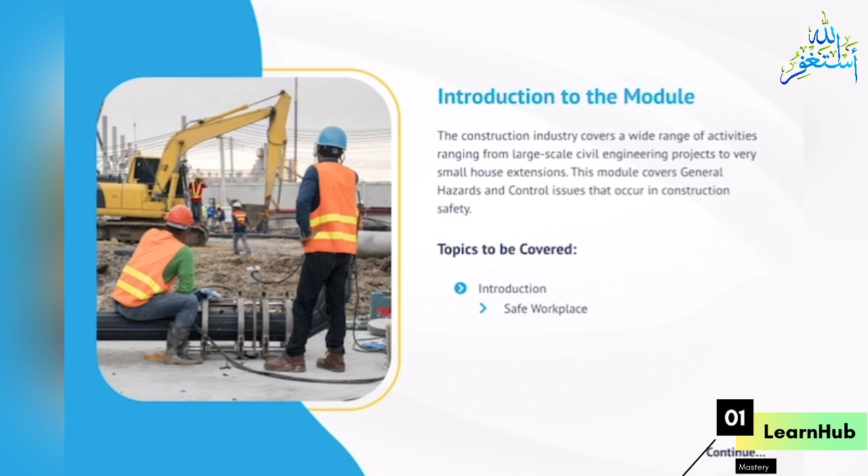Topics to be covered: Introduction, Safe workplace, General hazards and controls, Protection against falls, Protection against falling objects, Vehicles and traffic routes, Noise, Site controls, Site planning, Site security, and Provision of welfare facilities.

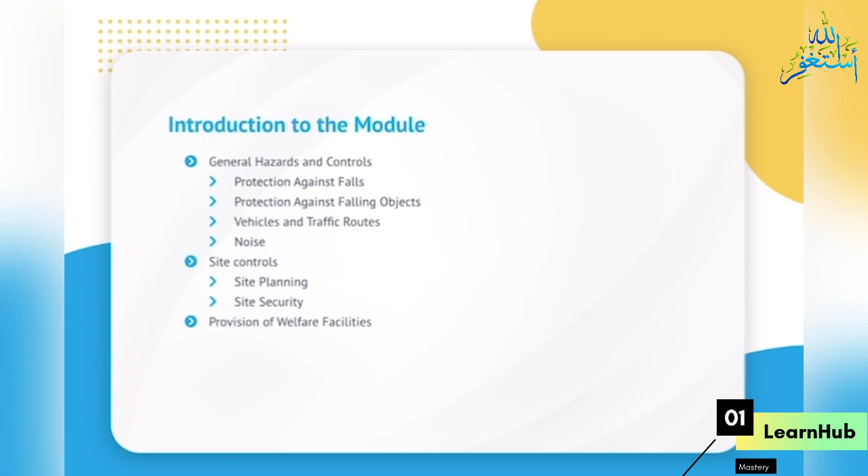Introduction. Over many years, the construction industry has had a poor health and safety record. In 1966, there were 292 fatalities in the industry, and by 1995 this figure had reduced to 62.

But by 2001 the figure had increased to 106. Over the last 25 years, 2,800 people have died on construction sites.

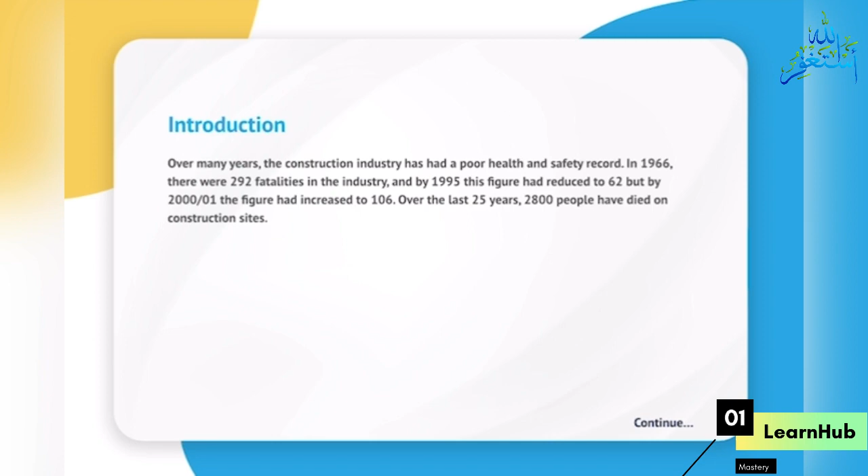These figures include deaths of members of the public, including children playing on construction sites. Although most of these fatalities, over 70%, were caused by falls from height, there are other significant causes.

The HSE has listed the main causes of fatalities as falling through fragile roofs and roof lights, falling from ladders, scaffolds and other workplaces, being struck by excavators, forklift trucks or dumper trucks, overturning vehicles, and being crushed by collapsing structures.

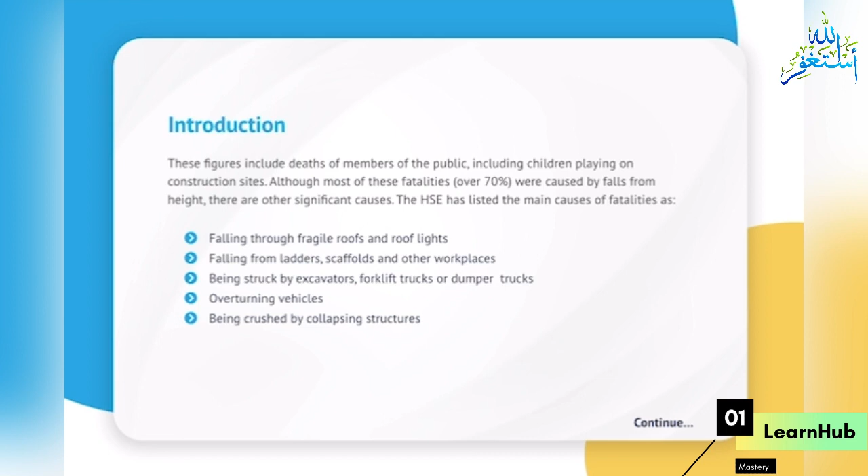Safe workplace. Safe entrance to and exit from the site, as well as specific work areas on the site, are essential to better health and a safe environment.

This clearly requires the safe use of ladders, scaffolds, gangways, stairways, and passenger hoists. It further requires that all excavations are fenced, the site is tidy, and proper arrangements are in place to store materials and dispose of waste.

When the site is not in use, it must be well lighted and protected against intruders, particularly minors.

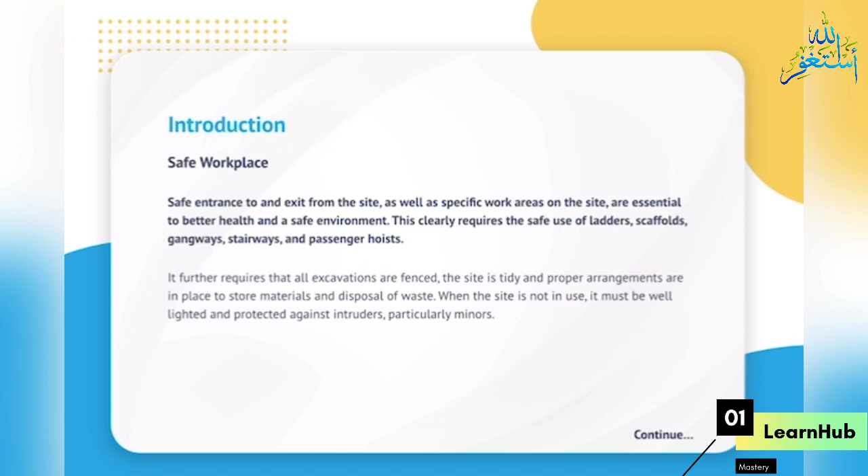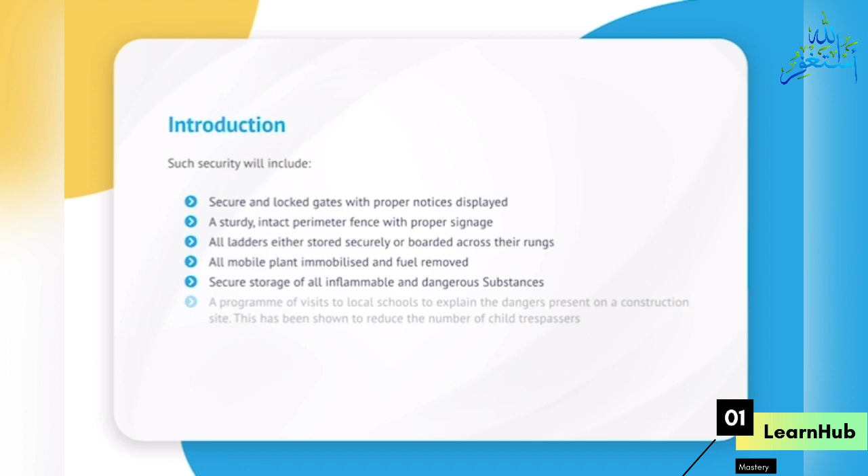Such security will include secure and locked gates with proper notices displayed, a sturdy, intact perimeter fence with proper signage, all ladders either stored securely or boarded across their rungs, all mobile plant immobilized and fuel removed, secure storage of all inflammable and dangerous substances, and a program of visits to local schools to explain the dangers present on a construction site.

This has been shown to reduce the number of child trespassers. Security patrols and closed-circuit television may need to be considered if unauthorized entry persists.

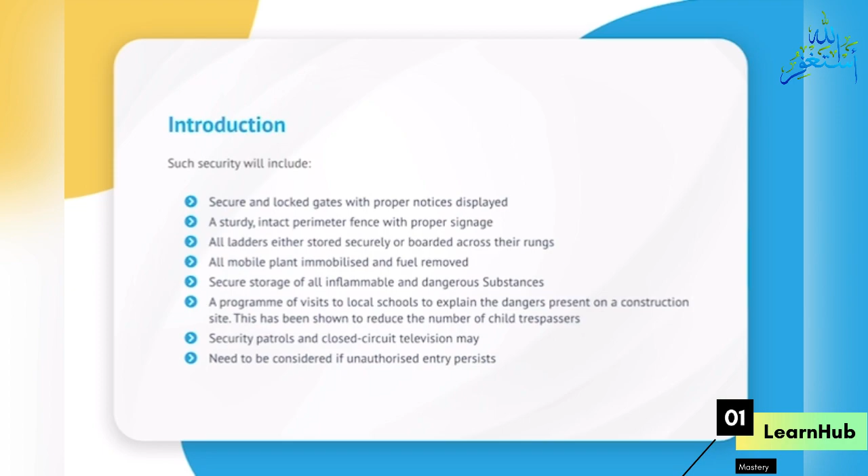General hazards and controls. The Construction, Health, Safety and Welfare Regulations 1996 deal with the main hazards likely to be found on a construction site. The hazards and controls identified in the construction regulations are as follows.

Protection against falls. Falls from height are the most common cause of serious injury or death in the construction industry. These falls are normally from a height but may also be on the same level.

It is important that trip hazards, such as building and waste materials, are not left on site walkways or roadways.

Protection against falling objects. Construction workers and members of the public need to be protected from the hazards associated with falling objects. Both groups should be protected by the use of covered walkways or suitable netting to catch falling debris.

Waste material should be brought to ground level by the use of chutes or hoists. Waste should not be thrown from scaffolding, and only minimal quantities of building materials should be stored on working platforms.

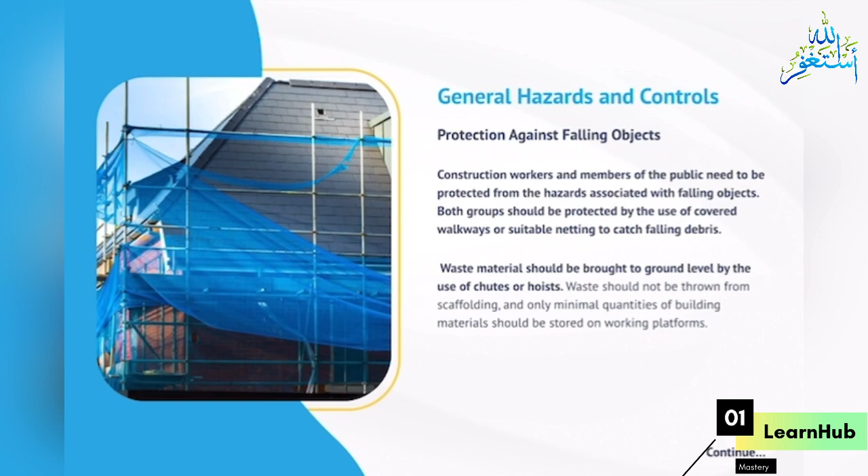The Construction Head Protection Regulations virtually mandate employers to supply head protection, hard hats, to employees whenever there is a risk of head injury from falling objects.

The employer is also responsible for ensuring that hard hats are properly maintained and replaced when they are damaged in any way. Self-employed workers must supply and maintain their own head protection.

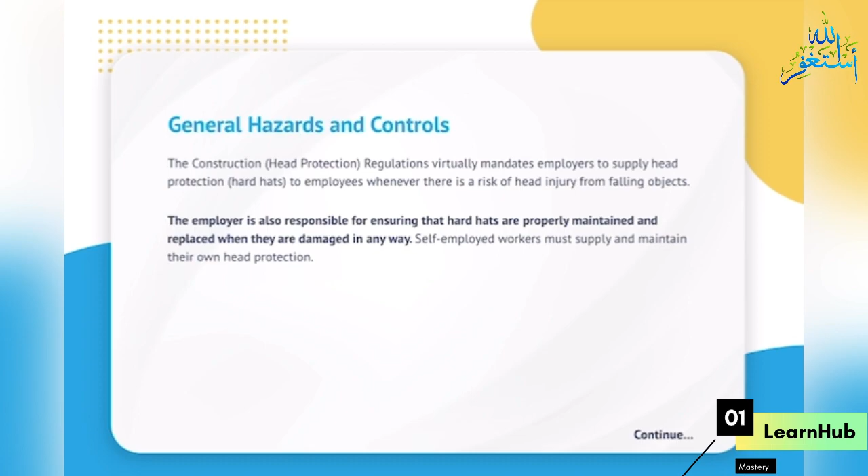Employees must wear head protection when so directed, take good care of it, and report any loss or defect. Visitors to construction sites should always be supplied with head protection, and mandatory head protection signs should be displayed around the site.

Injuries due to falling materials are not limited to materials falling from height. Many fatalities have been caused by the collapse of walls, particularly retaining walls, and by the collapse of excavations.

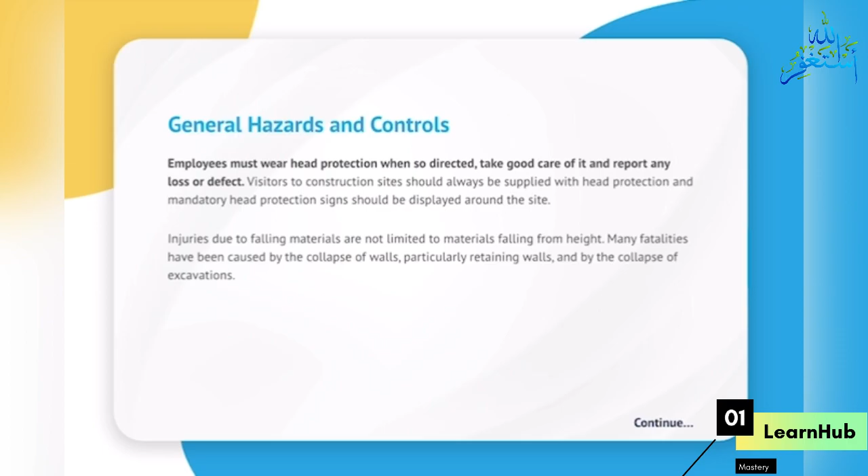Vehicles and traffic routes. All vehicles used on site should be maintained on a regular basis and records should be kept. Only trained drivers should be permitted to operate cars, and the training should be vehicle-specific. Vehicles should have reversing warning systems installed.

HSE investigations have shown that in over 30% of dumper truck accidents, the drivers had little experience and no training. Common forms of accident include driving into excavations, overturning whilst driving up steep inclines, and runaway vehicles left unattended with the engine running.

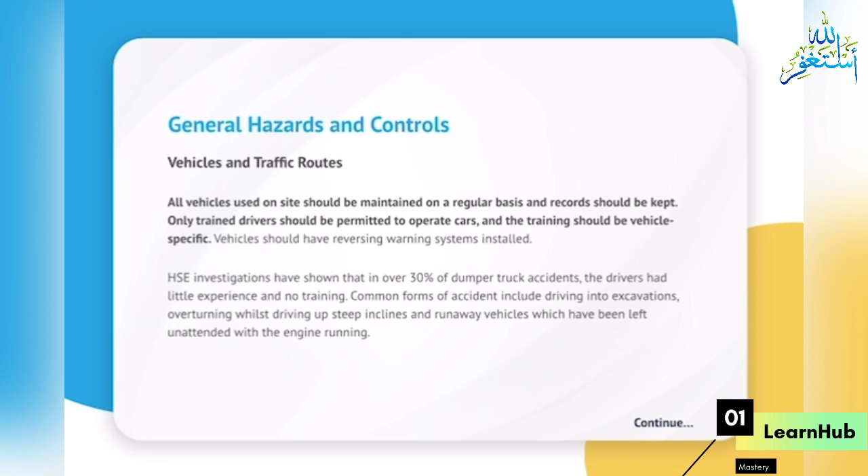Many vehicles, such as mobile cranes, should be inspected on a regular basis and have test certificates. Traffic routes and loading and storage spaces must be adequately constructed, with enforced speed limits, sufficient visibility, and vehicle and pedestrian separation in mind. The use of one-way systems and separate site access gates for vehicles and pedestrians may be required. Finally, the safety of members of the public must be considered, particularly where vehicles cross public footpaths.

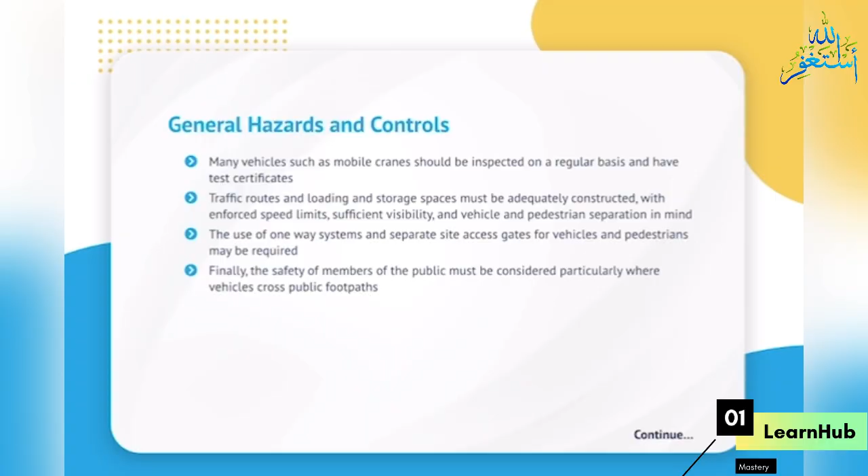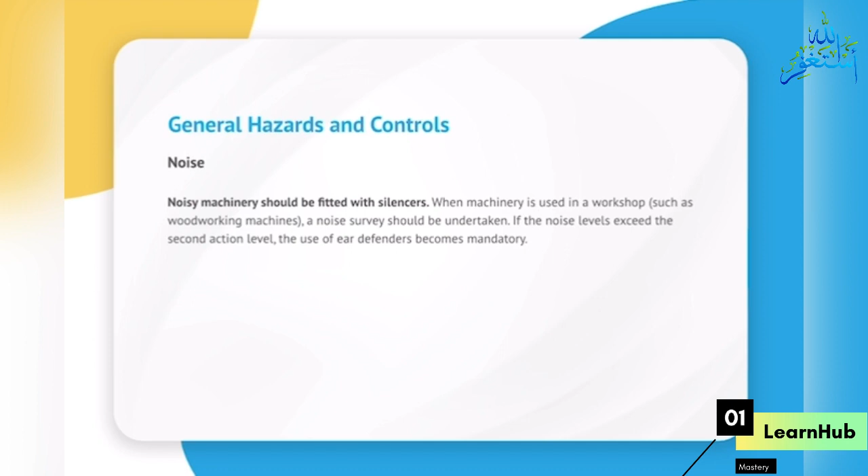Noise. Noisy machinery should be fitted with silencers. When machinery is used in a workshop, such as woodworking machines, a noise survey should be undertaken. If the noise levels exceed the second action level, the use of ear defenders becomes mandatory.

Site controls. Site planning. An essential element of site planning is the layout of the site. Due to a lack of forethought or planning, many sites rapidly degenerate into a muddled or confused state. This leads to a corresponding reduction in health and safety standards and an increase in accidents.

During the site planning stage, arrangements will be needed to ensure safe access to and around the site for pedestrians and vehicles. Care must be taken during the planning of traffic routes so that pedestrians and vehicles are kept apart as much as possible. It will also be necessary to provide suitable loading and unloading areas, which may need to be moved as the construction work progresses, and recognized parking areas.

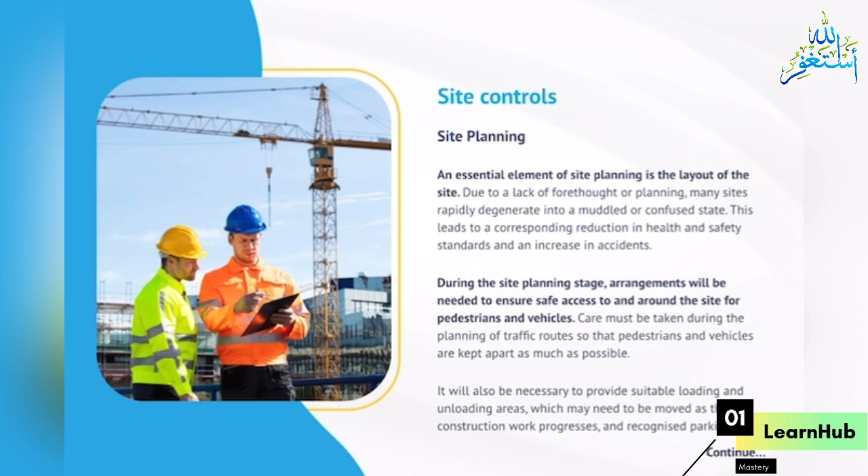Adequate lighting must be provided in all parts of the site, especially along vehicle routes, although natural light should be made available whenever possible. When lighting failure could lead to severe risks of accidents, such as working on a tower scaffold, secondary lighting should be provided, perhaps in the form of torches.

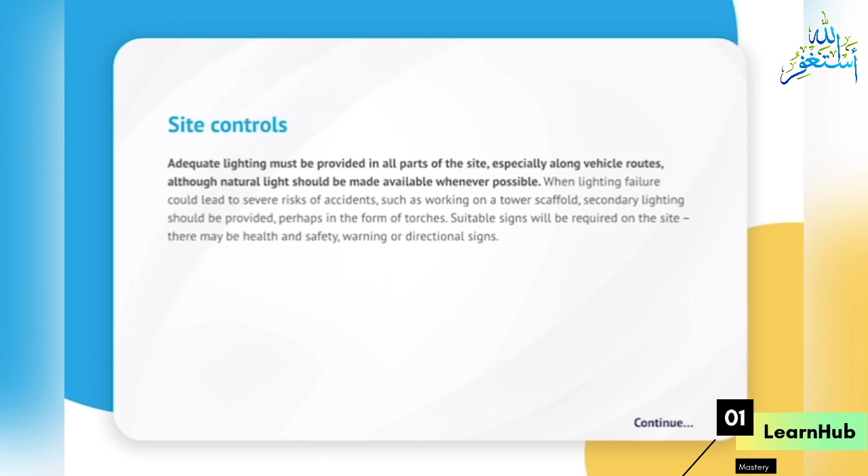Suitable signs will be required on the site. There may be health and safety, warning or directional signs.

Emergency arrangements need to be in place before work begins. These arrangements should deal with fire precautions, accident reporting and investigation, and the provision of an accident book together with RIDDOR reporting forms. Whatever the type of construction project, the disposal of any waste produced must be planned.

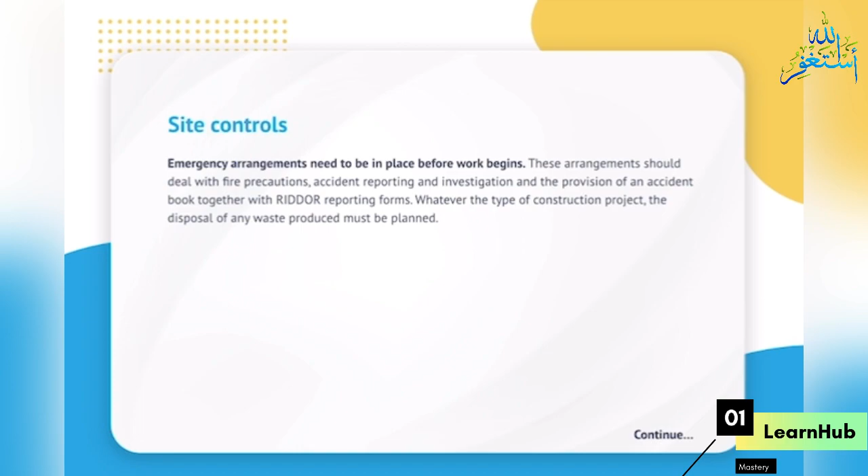There are four requirements for the transfer of waste from the site to final treatment or disposal. Firstly, the waste must be clearly identified. This will involve the determination of the chemical and physical properties of the material, the identification of any special problems associated with the waste, and that it is properly labeled with a written description.

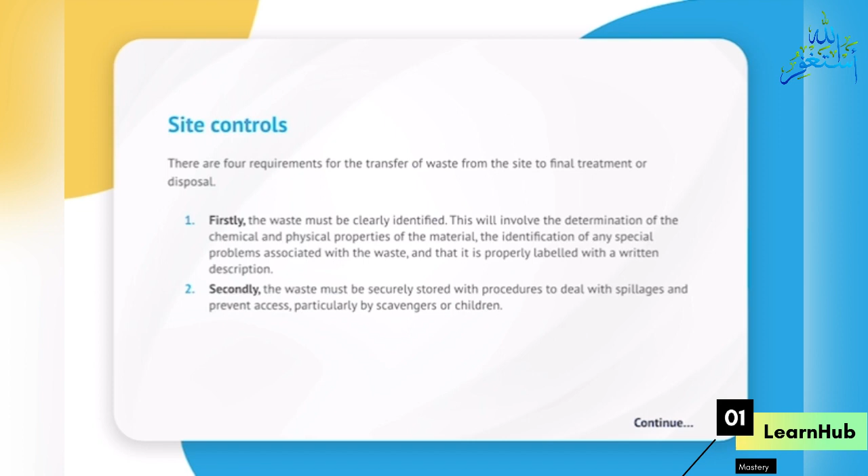Secondly, the waste must be securely stored with procedures to deal with spillages and prevent access, particularly by scavengers or children.

The third requirement is that the waste must be transferred only to an authorized person. Classes of an authorized person include registered waste carriers, holders of waste management licenses, or exempt parties such as charities or waste collection authorities. Waste transfer notes must be transferred from one duty holder to the next along the waste chain. Checks are advised to ensure that prospective waste contractors are competent to deal with waste.

The final requirement is that adequate records of waste consignments must be kept for at least 2 years in the case of controlled waste, and 3 years for any hazardous waste.

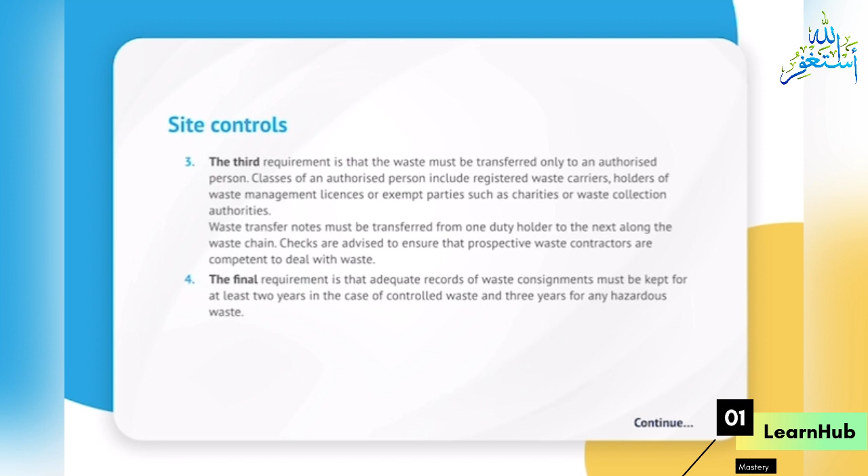Site security. Site security is required to ensure that construction materials, equipment and accessories are protected, and this is usually achieved by the erection of a strong perimeter fence and a lockable gate.

However, it is also important to protect members of the public, including trespass by children. This is particularly relevant for a refurbishment project when strong hoardings or secure fencing must be provided. There is also a need to ensure that the site itself is safe should children manage to trespass onto the site.

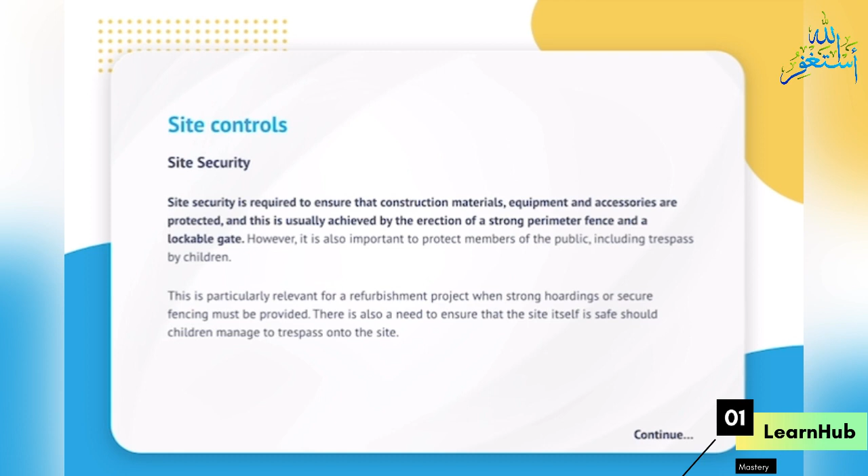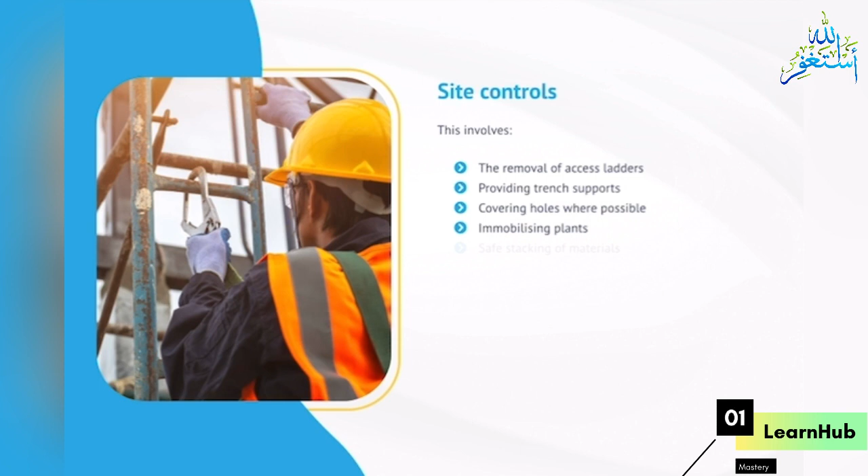This involves the removal of access ladders, providing trench supports, covering holes where possible, immobilizing plants, safe stacking of materials, locking away dangerous chemicals, isolating electrical supplies, and locking off fuel storage tanks.

Many of these problems may be avoided by visiting local schools to inform children of construction site dangers. Accidents to children on construction sites are a national concern and a widespread problem everywhere.

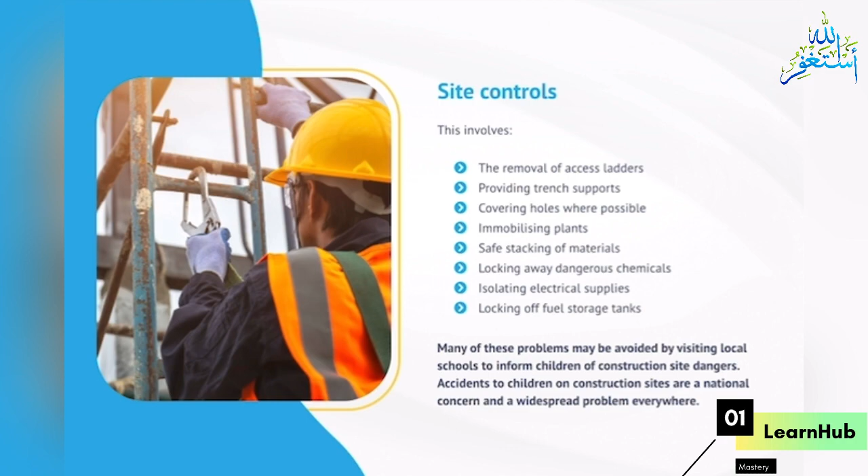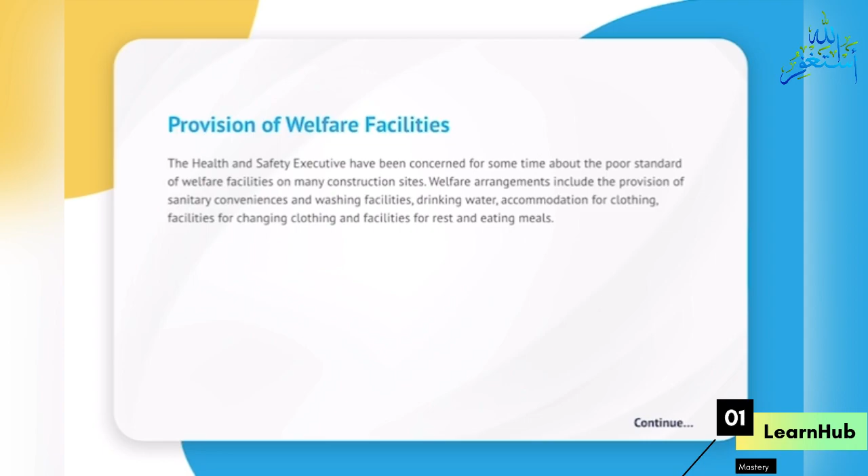Sanitary and washing facilities, including showers if necessary, with an adequate supply of drinking water should be provided for everybody working on the site. Accommodation will be required for the changing and storage of clothes and rest facilities for break times. There should be adequate first aid provision and protective clothing against adverse weather conditions.

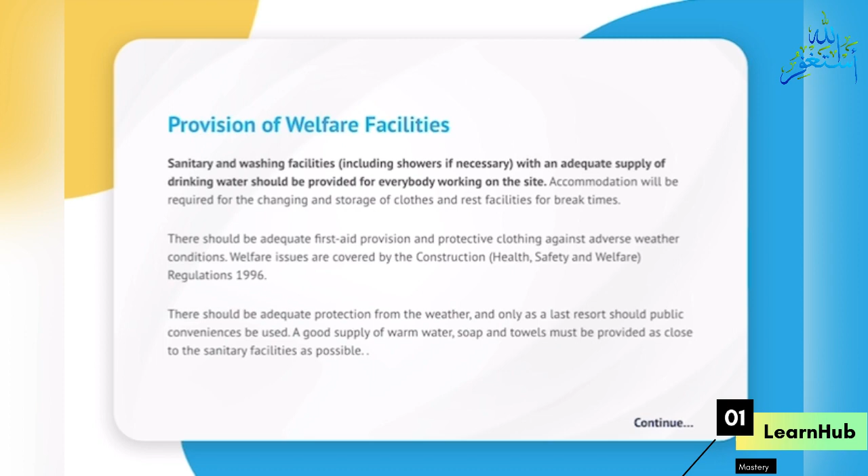Welfare issues are covered by the Construction, Health, Safety and Welfare Regulations 1996. There should be adequate protection from the weather, and only as a last resort should public conveniences be used. A good supply of warm water, soap and towels must be provided as close to the sanitary facilities as possible.

Hand dryers are permitted, but there are concerns about their effectiveness in drying hands completely and thus removing all bacteria.

In the case of temporary or remote work sites, sufficient chemical closets and sufficient washing water in containers must be provided. Drinking water must be readily accessible to the entire workforce.

The supply of drinking water must be adequate and wholesome. Normally mains water is used and should be marked as drinking water; if water is not fit for drinking, that should also be marked. On some sites, particularly during the early stages of construction, it may be necessary to provide bottled water or water in tanks.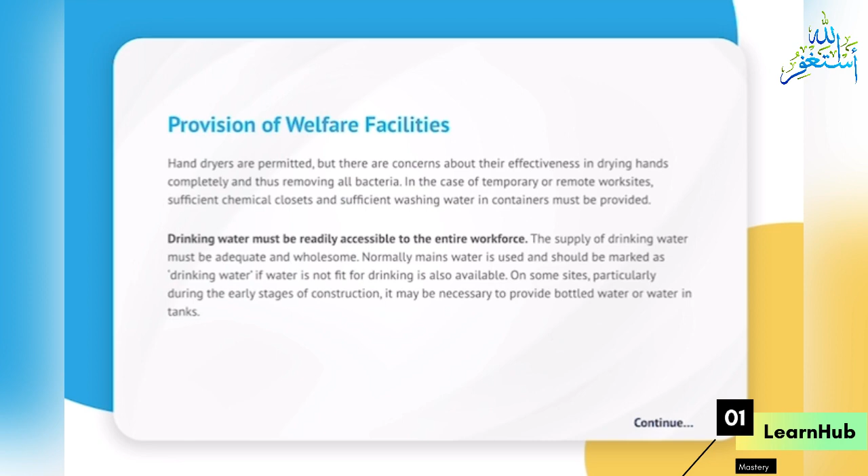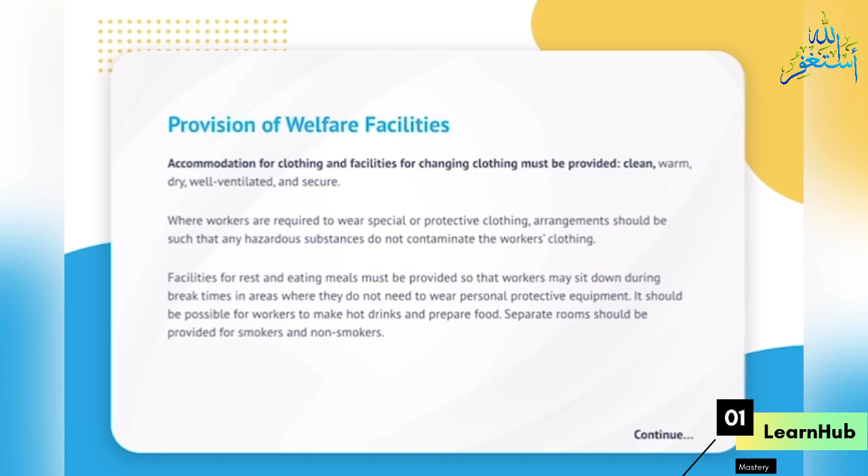Break times should be in areas where workers do not need to wear personal protective equipment. It should be possible for workers to make hot drinks and prepare food. Separate rooms should be provided for smokers and non-smokers.

Facilities should also be provided for pregnant women and nursing mothers to rest. Arrangements must be in place to ensure that hazardous substances do not contaminate food.

Many fires have been caused by placing clothes on an electric heater. Damp clothes should not be positioned in contact with the heater, and there should be adequate ventilation around the heater. If possible, the heater should be fitted with a high-temperature cutout device.

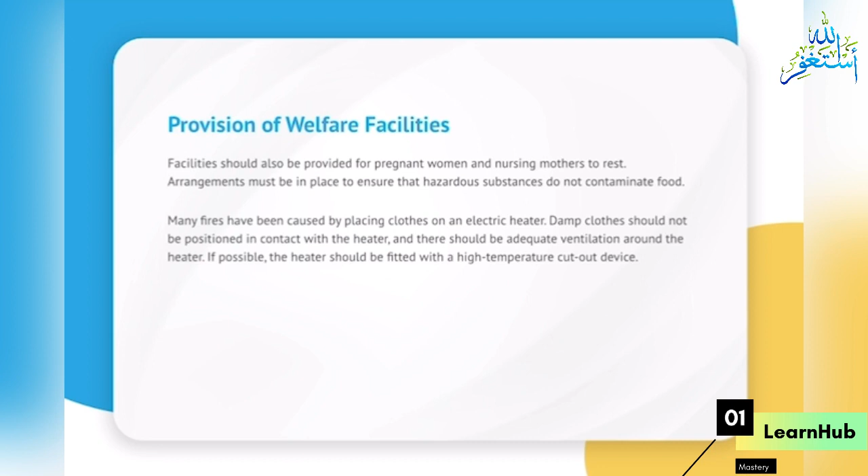Summary: in this module, we have covered safe entrance to and exit from the site, as well as specific work areas on the site, which are essential to better health and a safe environment. Falls from height are the most common cause of serious injury or death in the construction industry. Construction workers and members of the public need to be protected from the hazards associated with falling objects.

Only trained drivers should be permitted to operate cars, and the training should be vehicle-specific. Site security is required to ensure that construction materials, equipment and accessories are protected, and this is usually achieved by the erection of a strong perimeter fence and a lockable gate.